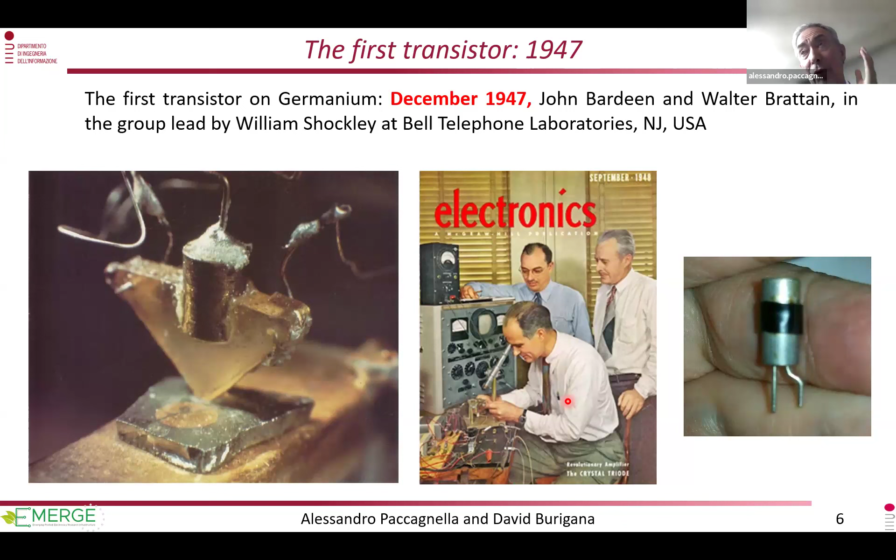Commercialization started, but really was not a big success for this type of point contact device. We had to wait until William Shockley invented the bipolar junction transistor, which then became the bipolar junction transistor we still use today. They were used first of all for hearing aids, but we had to wait for the real breakthrough.

The breakthrough was proposed by these two gentlemen from Japan, Akio Morita and Masaru Ibuka. They were traveling in the US in 1952, and they were two physicists who found that there was something new taking place - the transistor, something that really could disrupt the market and the society. And this is what they did.

They were not the first to propose the portable radio, but their product was a real success. It was cheaper than the American counterpart, it was handy, it was proposed in 4 colors, and it was easy to use. The portable radio became the first mass production involving transistors - millions of transistors were produced just for this type of application, a real killer application.

Japan was badly and dramatically defeated by the two nuclear explosions in Hiroshima and Nagasaki in August 1945. In 1959, Japan was already the first producer of germanium transistors worldwide, and at the beginning of the 60s, it was also the first producer of silicon transistors. So the industrial capability of Japan and the technological advancement, the quality of their research, was already in place just 10 years after the dramatic conclusion of the Second World War.

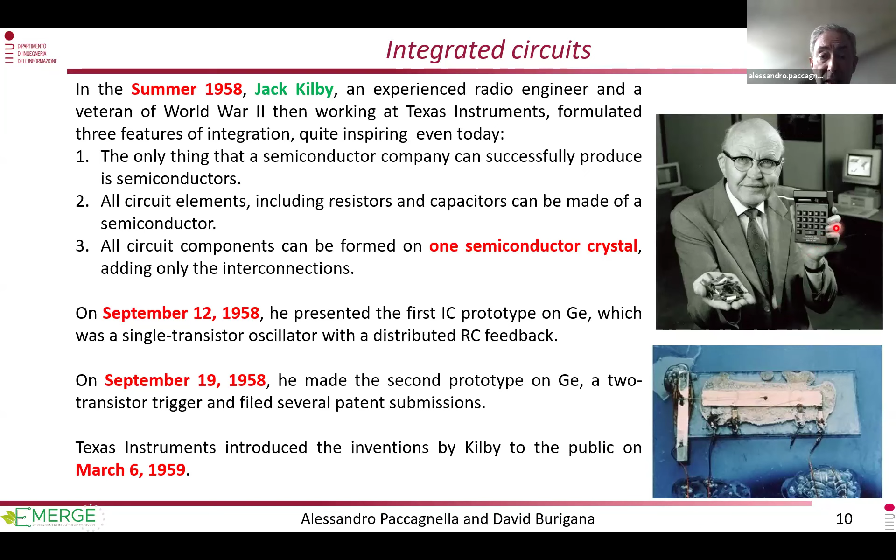The three inventors of the transistor got the Nobel Prize in Physics in 1956. Jack Kilby got the Nobel Prize in Physics in the year 2000 for his invention. It became something really innovative but risky.

You can see here how much was the role of federal agencies in buying this new technology, transistors and integrated circuits. The evolution of the transistor semiconductor market pushed toward big growth, but the percentage of sales due to the US government was still high at the end of the 60s, about 30%, and even higher for integrated circuits. It was a new technology, expensive, not immediately available for commercial use.

In fact, the NASA Apollo program was the largest single consumer of integrated circuits between 1961 and 1965. This again means there was a big start in the US, with strong support from governmental agencies to support this innovation.

Now, in this very fast run across the history of microelectronics, we arrive in 1971, where the first commercial microprocessor, the Intel 4004, was launched on the market. It contained about 2,300 transistors with silicon gate technology proposed by Federico Faggin.

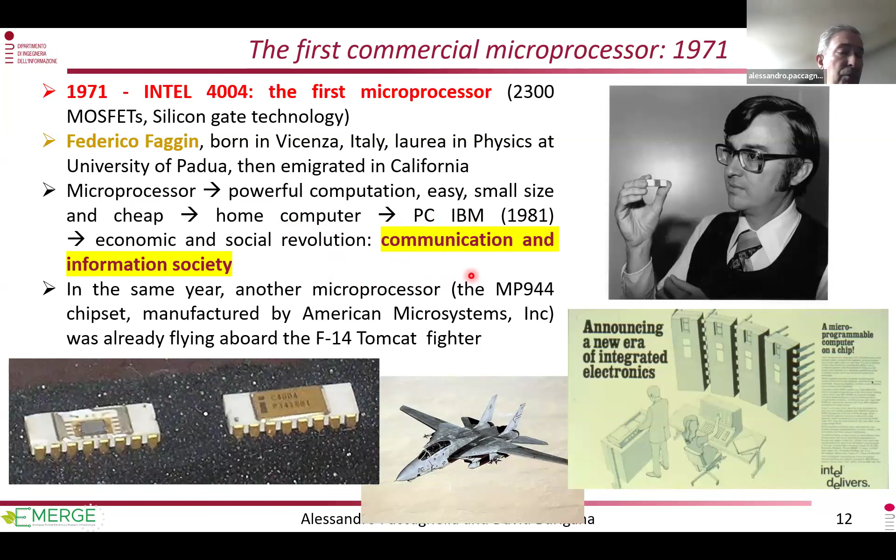Please notice that in the same year, another microprocessor, actually a set of chips manufactured by American Microsystems, was already flying aboard the F-14 Tomcat fighter. This means there was strong support by the federal government to develop this type of application, but we only learned about this 25 years later.

In the 70s, the world was divided into two big blocks facing each other: the American-led bloc and the Soviet Union-led bloc. The Soviet Union understood that microprocessors could change the rules of the game, so they started copying chips developed in the US. You can see here Intel, Motorola, Zilog, and again Motorola, with the copies of American chips arriving some years delayed.

It was a bad decade for the United States due to the withdrawal from Vietnam, the Watergate scandal, and Nixon's resignation. There was also, in 1973, the Yom Kippur War. But this looks not so unfamiliar these days, because after 50 years, in 2023, we have another big war started in the Middle East, and not yet, unfortunately, peace.

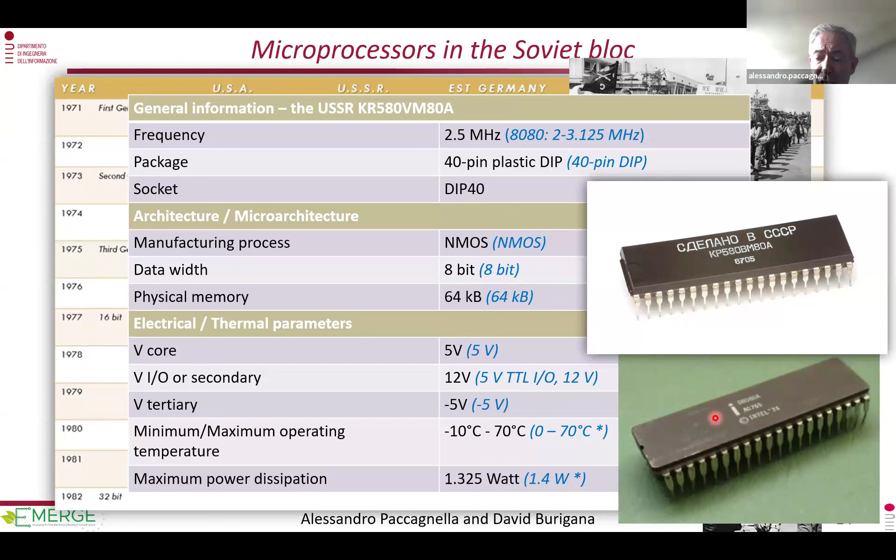In a few years, the technological and scientific power of American industries became no longer reachable by industries of the Soviet bloc, and this marked a substantial defeat of the Soviet bloc in terms of advanced technologies. How could this be achieved?

This is a paper from the CIA stating that in production of integrated circuits in 1973, the field was dominated by the United States, then Japan, then Western Europe, and the Soviet Union with just 4%.

How was this goal achieved of keeping Soviet Union production so low in the field of microprocessors and integrated circuits? This is a very important line: international embargo of semiconductor production technology and equipment. This means that by applying these rules, Soviet progress in developing a large and technologically advanced semiconductor industry would remain slow.

Despite occasional diversions, the embargo was generally effective in denying the Soviet Union access to advanced production technology, and this held true until the Soviet Union collapsed in 1990-91. But in the meantime, something important took place.

This was the formation of the Semiconductor Industry Association in the US, seeking to strengthen US leadership in semiconductors by working with Congress, the administration, and other key industry stakeholders. You see how important the relationship between industry and institutions was to support the development of semiconductor and microelectronic industries, and to keep the adversary at a delayed stage.

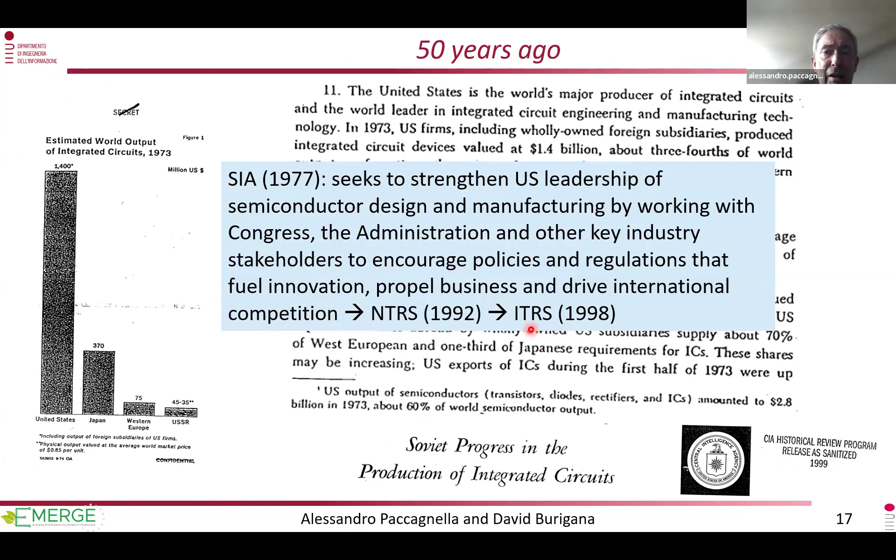Now we have more than 100 billion transistors in a single chip for the most advanced digital chips produced these days. This led to the evolution of our society from the transistor radio to the mini computer, to the internet, to mobile, and now to our era, which is the 5G or artificial intelligence era.

In 1990, we were in the full American crisis—6 Japanese industries were at the top, then 3 American, 1 European. In 1998, the ITRS was launched.

In the year 2000, it was the golden age of European industries: 3 Japanese, 3 American, 3 European—ST, Infineon, and Philips, which is now called NXP. In 2003, China joined the WTO, and it was a big change.

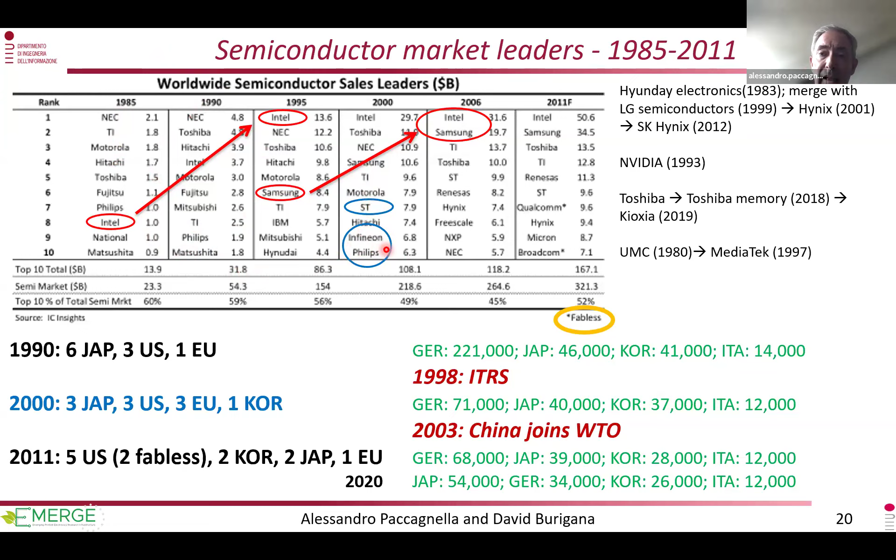The earlier success of Europe that we talked about was very much due to the fact that in this decade, the first framework program, the Esprit program, the Eureka program were launched, and Europe invested a lot of money in semiconductors. Then attention declined, and figures were not so successful, even though 25 years ago some people—and I report some sentences here—stated that semiconductors are really relevant to our work.

Semiconductors would seem to be the embodiment of a central tension that exists in our system of technology and trade. And here there is another scholar, Alan Tonelson, stating that failure to develop adequate public policy responses to globalized capital and technology flows will have staggering economic, social, and political implications that few are thinking about systematically today.

So 25 years ago, somebody stated it was important to think about the support governments should give to semiconductors. Semiconductors have in fact experienced growth of about 10% per year, more or less—a little less perhaps, but definitely increasing. This year is expected to bounce back and reach a figure close to $600 billion.

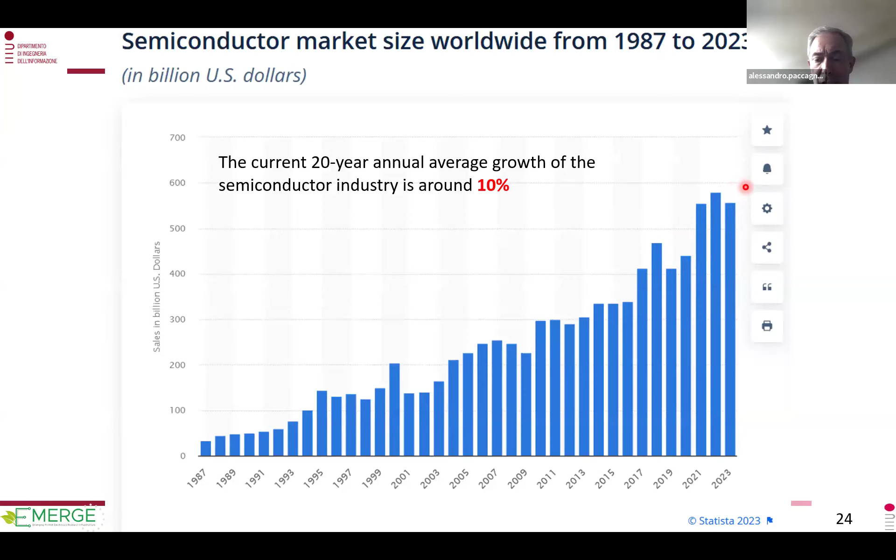If we look now at the situation at the beginning of this decade, we see things have changed dramatically. In the first 5 positions were Samsung, SK Hynix from South Korea, Intel, Micron from the US, and this new player everybody is talking about today, TSMC from Taiwan. This was a very important step made by the Taiwanese government to support this industry.

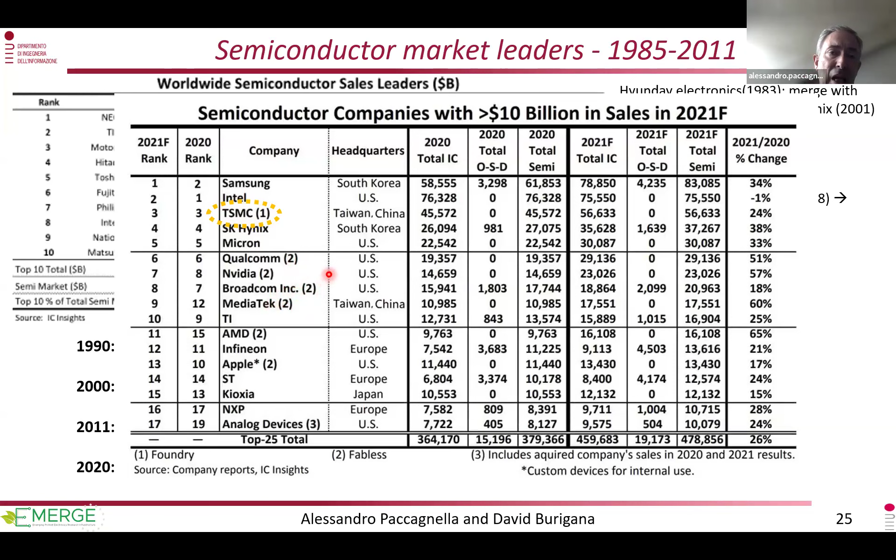But what about Europe? Europe stays here—ST, Infineon, and NXP. Japan is not flourishing, it's here. And you can see here, marked with number 2, a lot of industries which rely on somebody else producing the chips, because they take care only of designing the chip. This is a big push to the development and growth of TSMC.

TSMC was founded by Morris Chang in Taiwan in 1987. Please notice that it's the same year martial law ended in Taiwan—so it was really the opening of a new market, a new era. They started with relatively old technology, but very soon they were capable of advancing the technology nodes, and they are now leading, producing at the 5 nanometer scale, this company TSMC, and Samsung.

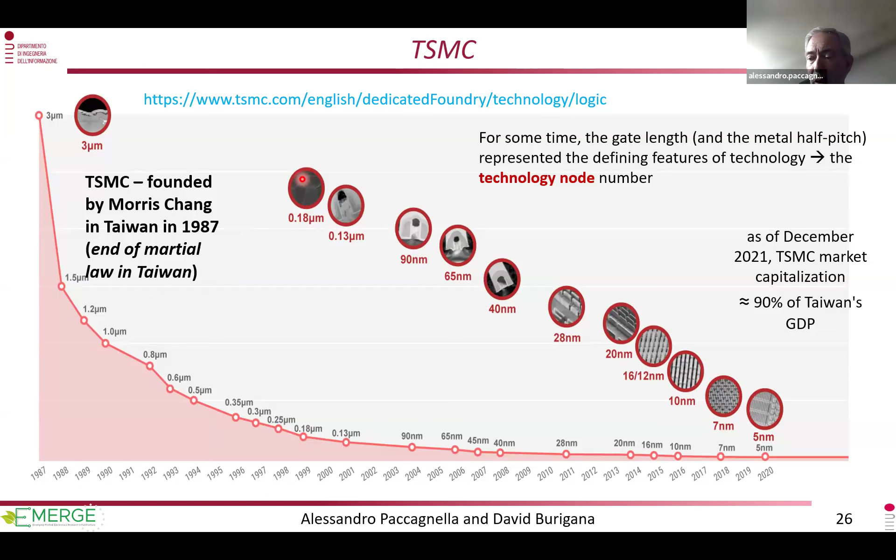Intel is a little bit delayed.

What about China? Well, China was very wise because the People's Republic of China invested a lot of money to develop their own semiconductor industry. President Xi Jinping is an engineer, so he's aware of the technological relevance of many products, and he is focused on semiconductors.

Semiconductors are one of the fundamental products to gain independence, relative independence, to an important degree, for his country. You can see here, if we look at the beginning of the century, Europe had a 20% share of the market, the same about US, and China was just showing up. But now China has gained an important part of the market, and Europe has declined dramatically, less than 10% of the market.

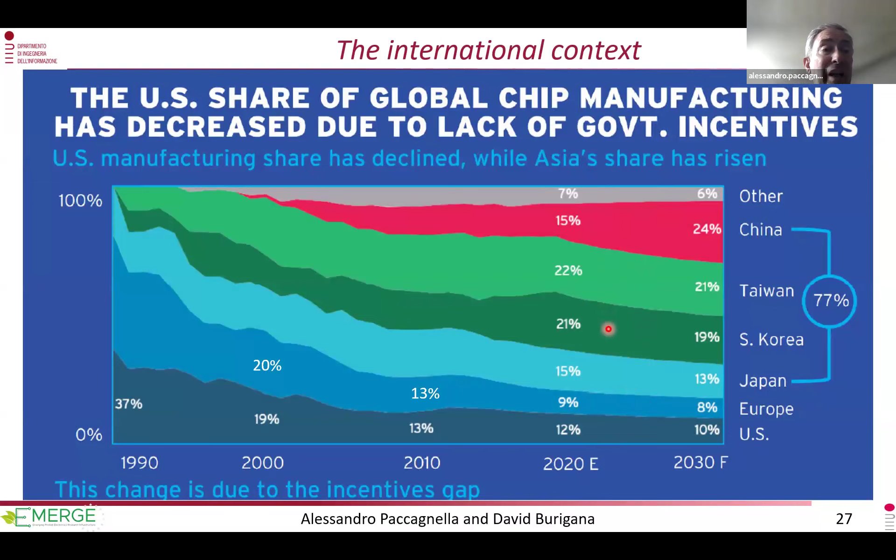The same has taken place in the United States. Basically, we have relied on other countries, People's Republic of China, Taiwan, South Korea, to produce the chips that we need for our products. This means that we really rely on East Asia, at least part of East Asia, China, Taiwan, South Korea, or Japan.

And you know how important and how relevant is now the situation between China and Taiwan. We'll speak about it in a few minutes. And here it is.

Taiwan is considered by the People's Republic of China as a separate province, and China expects to take back Taiwan. So the tension between mainland China and Taiwan has been growing during the last years, and we are scared about a possible war between China and Taiwan.

Somebody says that possibly the relevance of TSMC and of the silicon ecosystem in Taiwan may shield it from Chinese invasion. We'll see if Taiwan will remain less connected to China as it is now in the next years, even though some war winds are blowing in the Formosa Strait.

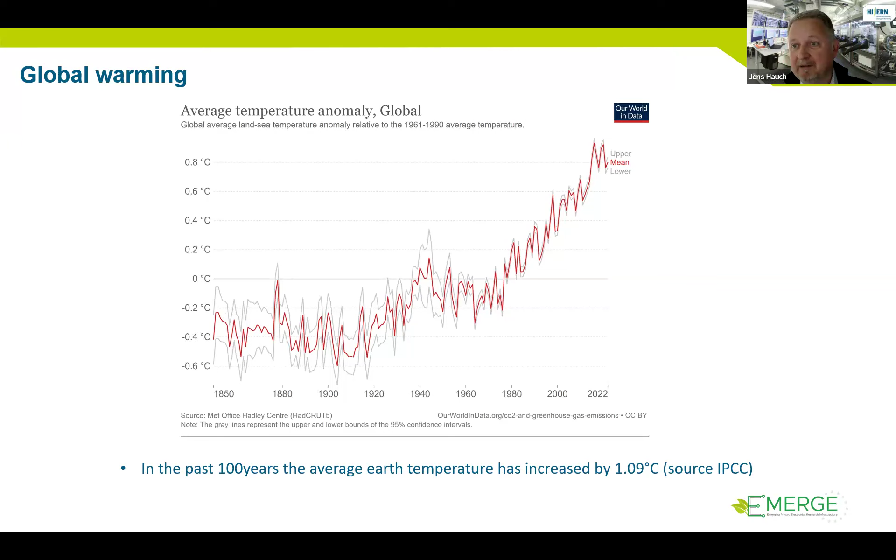This is from the IPCC report. We're at 1.09 degrees Celsius currently, and it does not look like we are really slowing down, to be honest. This is where we, as scientists and material scientists, can help.

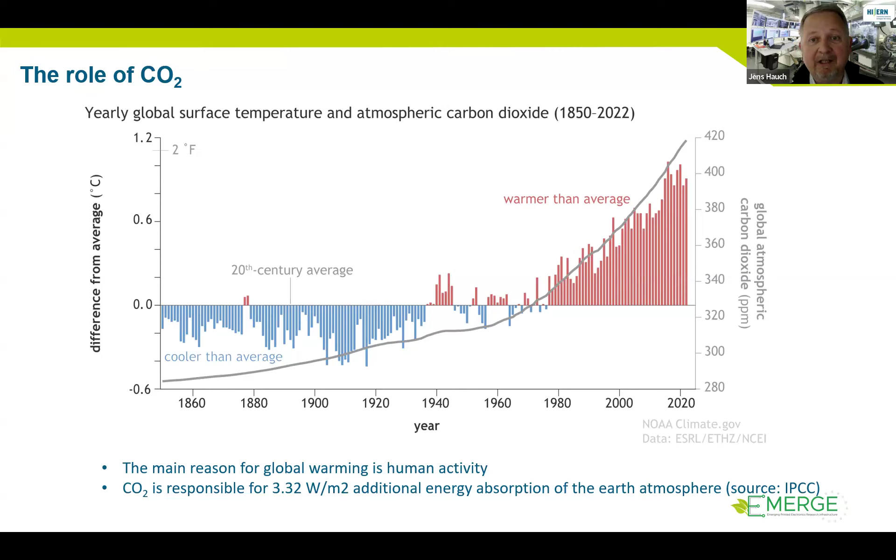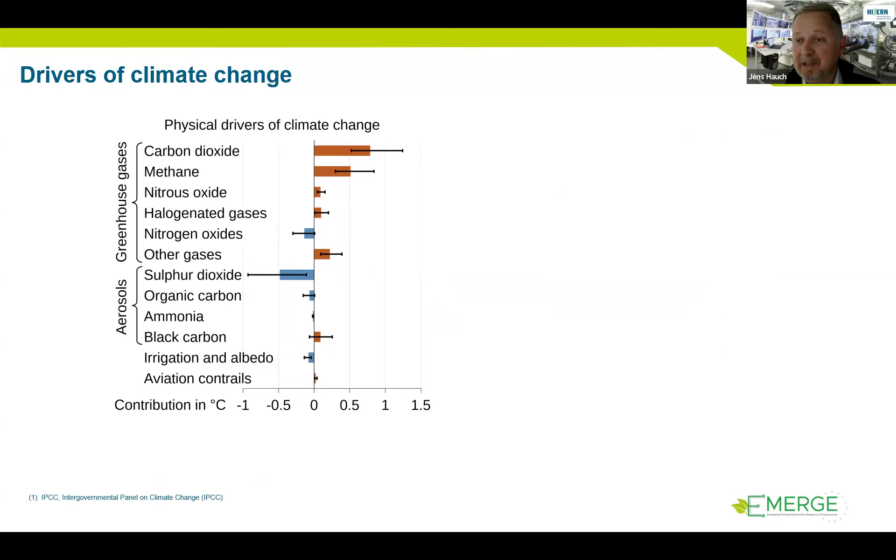If we look a little closer, we can identify the reason for this. I think this is fairly uncontested: it's CO2. It's very clear how much of a contribution CO2 gives to this climate change, and this is all scientifically investigated and documented. There shouldn't really be many reasons to discuss it, although politics is contesting all of this. It's also fairly clear that this is strongly related to energy consumption.

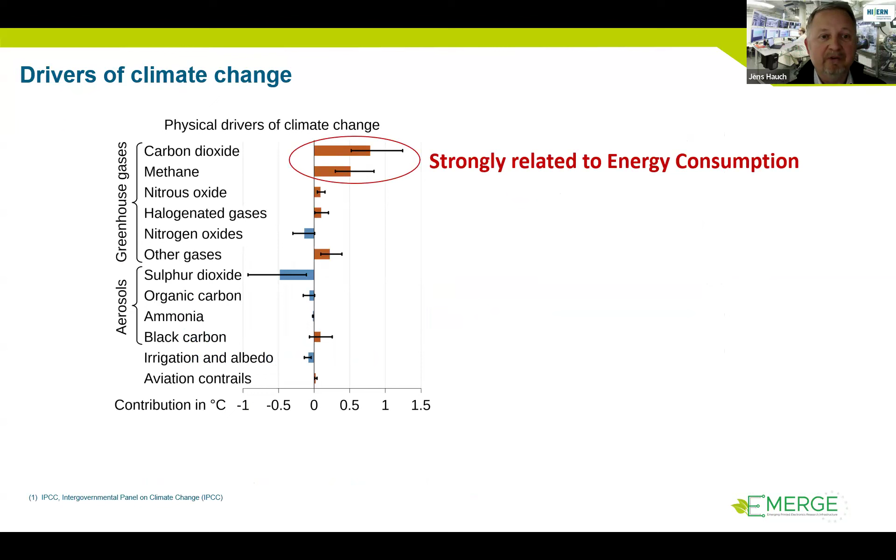The good news is that we actually do have solutions. If you look at the IPCC report, which I can recommend to everyone, you can see in detail what we can do and what the potential is for CO2 reduction for different technologies.

Now, this is a little small, so I'm enlarging this part up here. When you look up there, you can see that solar energy has the highest potential for reducing CO2 emissions out of all the technological solutions we have available. That's good for me as a photovoltaics researcher, but it also means this is an important subject.

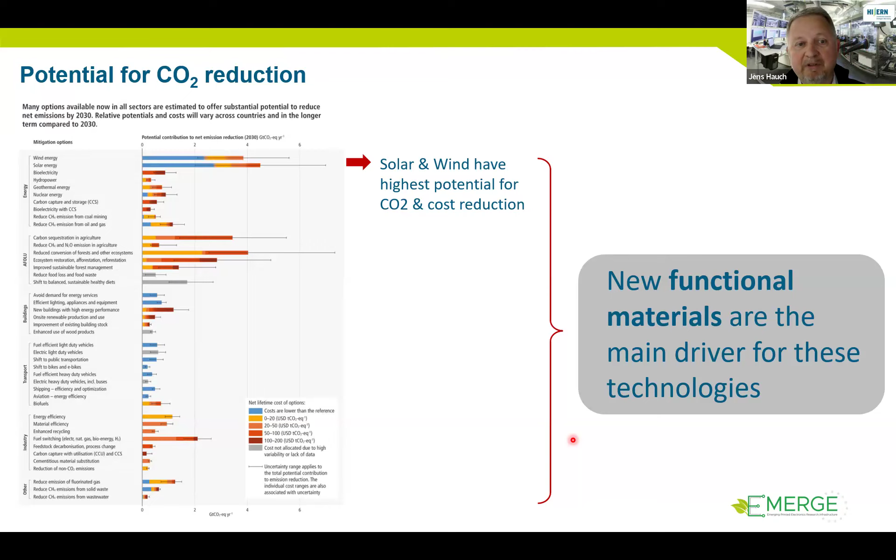But I don't just want to talk about this solution. What I want to make clear is that apart from solar and wind having the highest potential for CO2 reduction, and also for cost reduction, new functional materials are the main drivers for these technologies. This is where things start, with the development of new materials and processes that turn these materials into functional materials to fulfill certain functions.

So this is a short introduction. The next question is, what is actually needed to solve this problem? From a materials point of view, we can take on these major technologies that we're looking at.

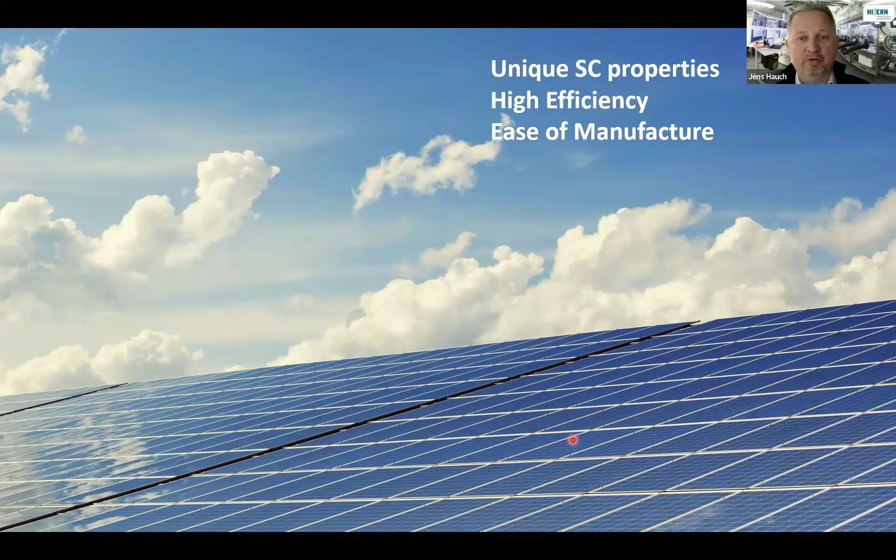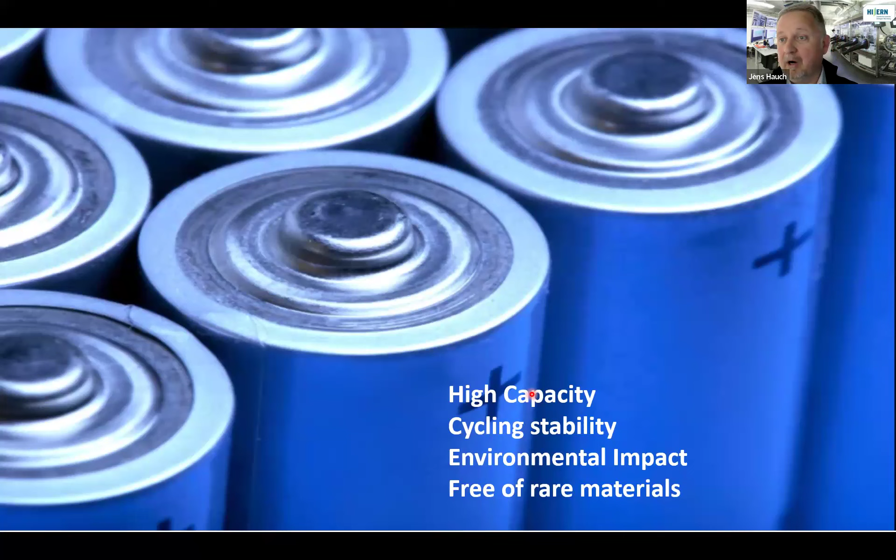For solar, we're talking about semiconductor properties. We need efficiency, we need simple manufacturing processes, that's what we're looking for. But similar things go for wind: we need lightweight materials with high strength that are abrasion resistant. Or we need batteries with high capacity for energy storage, low environmental impact, ideally something that doesn't use rare materials that are hard to come by and that we will run out of if we need too much capacity, or we need fuel cell materials.

When we do all this, we shouldn't get lost too much in just physical properties, because one thing we always need to consider — my advisor told me the most important physical property of a material is sometimes its cost. We need to pay attention to this as well. We need to find ways to solve these problems with low-cost materials that are abundant, available, and ideally recyclable, because we need a lot of these things.

So now we know what we want. The question is, how do we get there, or how long does it typically take? This is reasonably well known; many technologies have been developed over the past century or so. Of course our abilities have changed, but traditionally, a new technology from its discovery to its application in a large-scale commercial product takes about 20, 25 years.

That was the case when I was a PhD student, and that still is the case today. There are no firm studies, no real statistics, but the 20 years are something.

If we look at our calendar, it reads 2025. Many of the goals on our table for tasks we need to resolve to limit climate change, we're looking at solutions that need to be implemented before 2050, way before 2050. 20 years from now is 2045. We can't wait until then to solve things. We need things quicker. So this is my message.

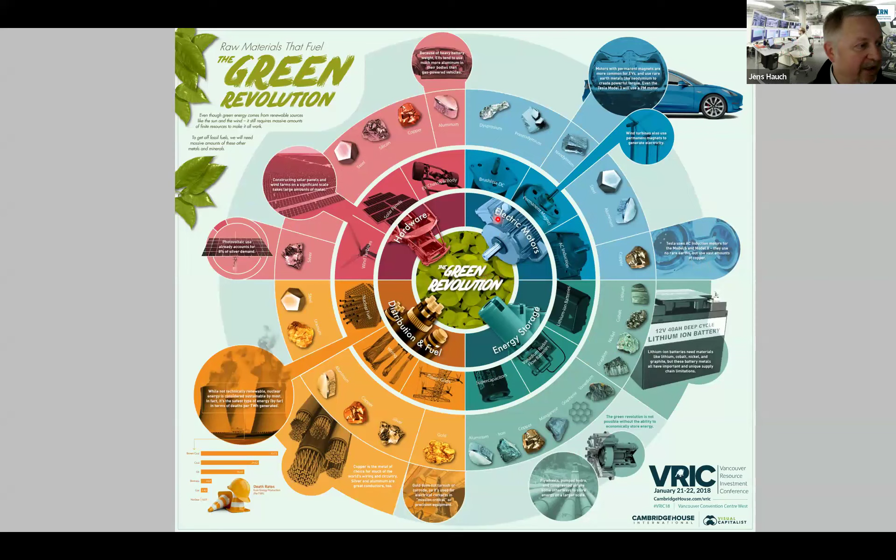Here's a plot showing the green revolution, going from raw materials all the way to technological solutions in the end. What you see is there are many things in between. We're going from the outside to the inside here, starting with a raw material that we have to turn into a functional material. Then we take this functional material and somehow turn it into a device which fulfills a certain function. And with that, we can actually start building systems.

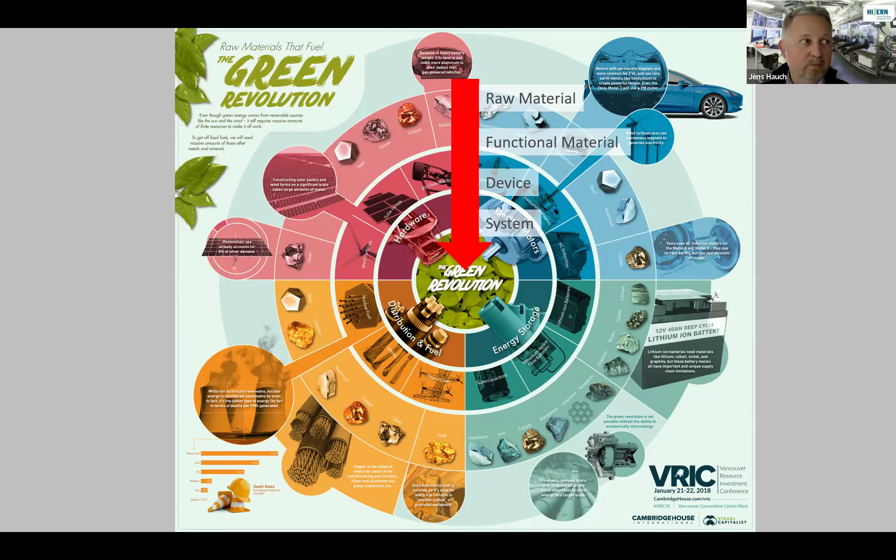So wonderful, how do we actually do this? Politics has come up with an answer, and it was actually implemented already more than 10 years ago. So this is not such a new idea.

Back then, there was a so-called Mission Innovation implemented in 2015. This was opened up by President Obama, and he said we can do it faster. I would contest to it: we can't just do it faster, we actually need to do it faster. So we have to accelerate.

From the acceleration part, let's jump into actual technology development. Since I come from PV, it makes sense for me to start with a small case study of photovoltaics. My case study starts in 1955.

1955, it was actually quite amazing. Bell Labs built this system, a module of solar cells together with a battery that could store this, and it was marketed as a solar battery. We don't actually know what the price of this system was, but we're fairly sure it was much larger than $100 per watt. It was quite innovative and visionary. Not sure how many systems actually sold.

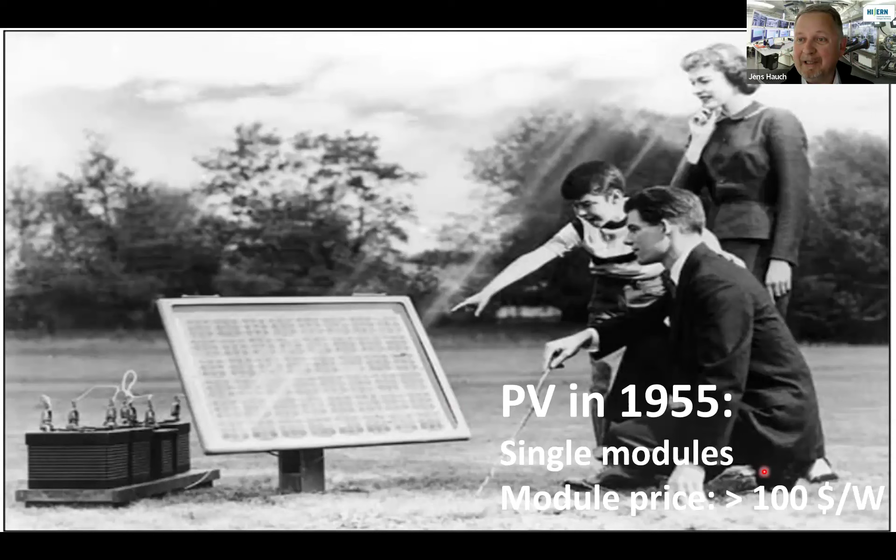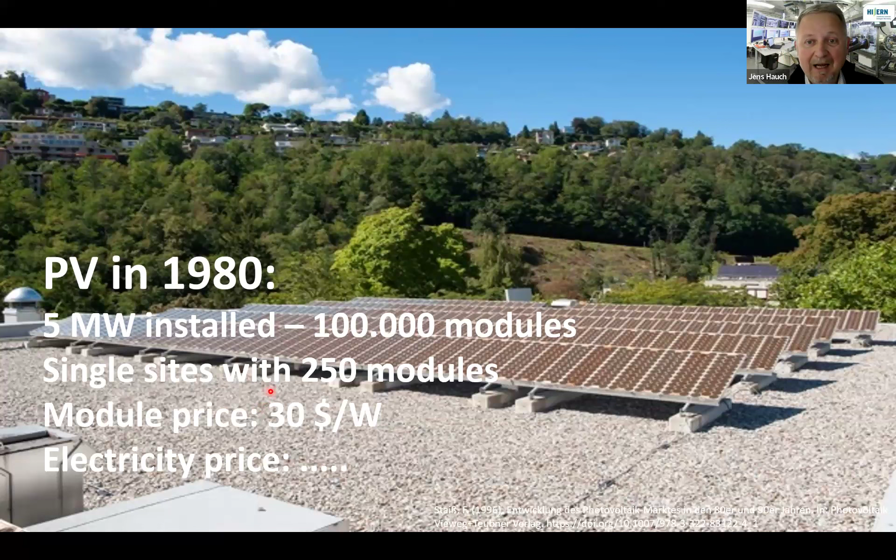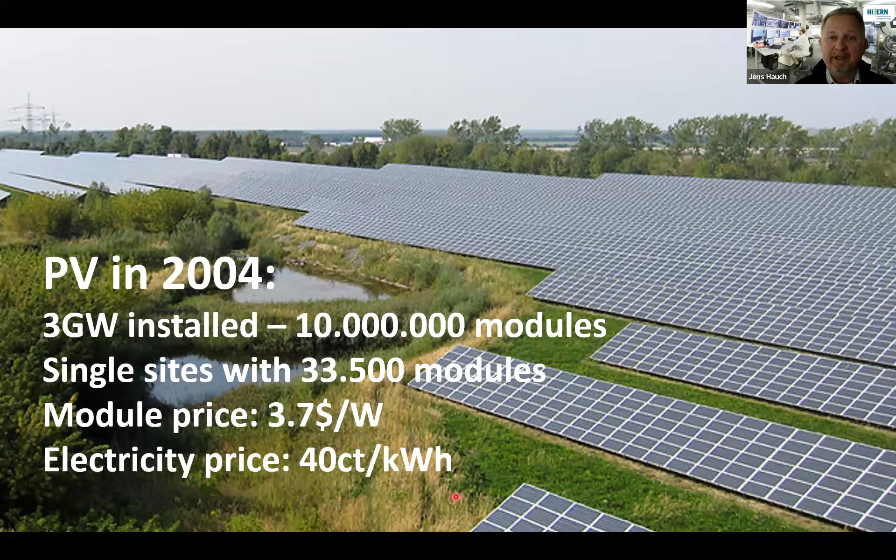Fast forward another circa 25 years, in 2004, we had entered the gigawatt era from the megawatt era. Now millions of modules installed, individual sites with tens of thousands of modules. Module price roughly $3.70 per watt peak, and a levelized cost of energy now at roughly 40 cents per kilowatt hour, which made it pretty interesting because this isn't so far away from actual energy prices elsewhere.

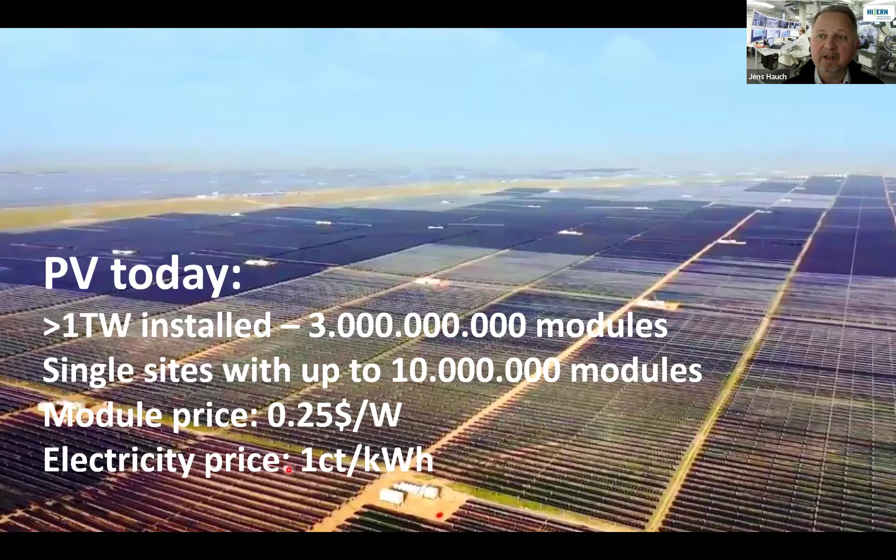Now let's fast forward again. 25 years forward isn't possible, but where are we today? We've entered the terawatt age. We have billions of modules. We're approaching a time on this planet where we'll have more solar modules than people. Very interesting change. We have sites now that contain millions of modules, not just thousands or hundreds of thousands, but millions. And we're approaching electricity production prices of 1 cent per kilowatt hour. This is the lowest cost energy source we have ever had.

So how do we get there? A little drier representation of what I just showed you is this chart, which we call the learning curve for photovoltaics. It comes from the ITRPV roadmap, an industry-driven roadmap, put together mainly by the VDMA, a German Association of Machine and Equipment Builders.

Here you see on one end the average module sales price, the cost per watt in a module in US dollars, calculated as the value in 2011, versus the total cumulative shipments. As you see, we have a fairly nice relationship on a log-log scale.

This relationship, this exponent, is actually what defines the learning rate of a technology in the end. The important point here is that this does not reflect time.

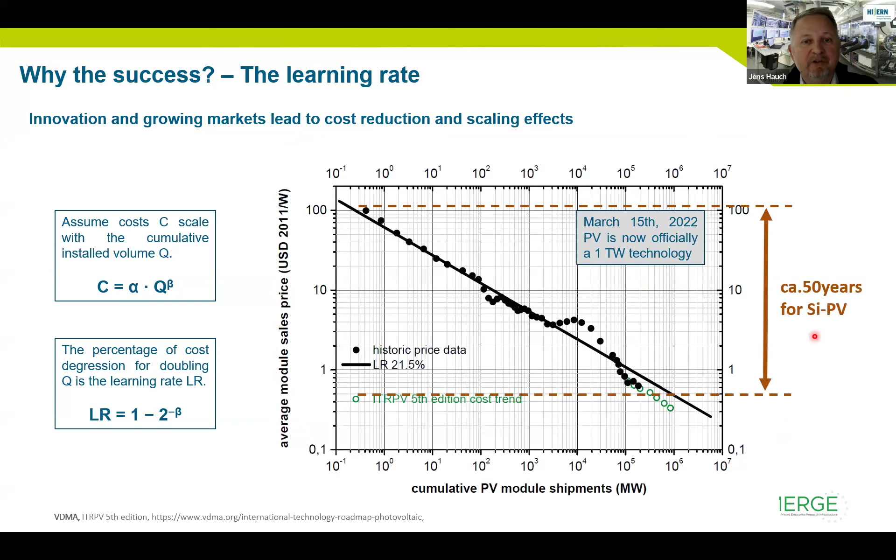And while this is a great success story, it's also clear that this took 50 years for silicon PV, a technology that is now well established, but it's also hitting its technological limits these days. So the question is, where are we going from here?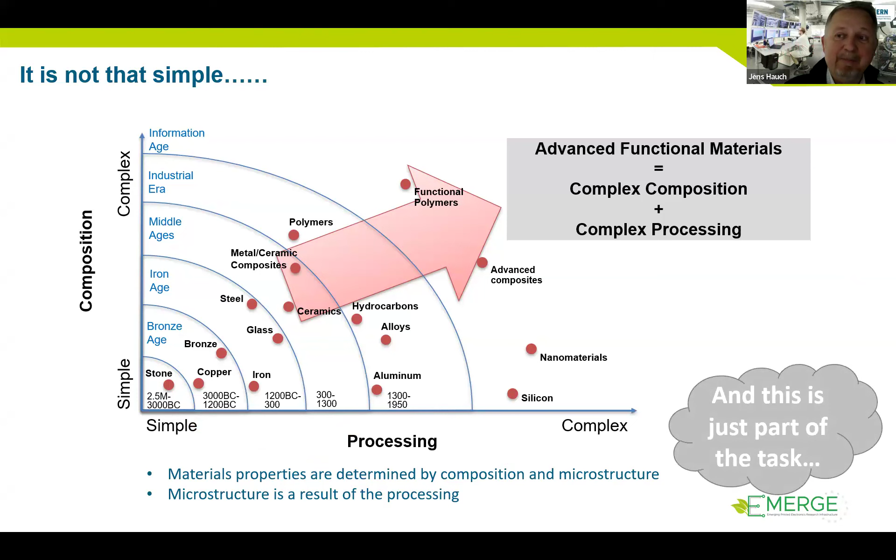So this is what we have to deal with, and making this material is really just part of the task we have to accomplish. We start with intrinsic properties that develop on the scale of atoms and molecules. Then, as we assemble these into a micro scale, bringing many molecules together, they turn into composites. We get to the micro scale, and certain functionalities appear. If we just have 10 materials and turn them into composites, we may have to investigate thousands of composites. So there's a combinatorial problem we need to solve.

And then we need to go to layers, at least for the solar cells we make. They're multi-layer structures, multiple thin films stacked on top of each other. Each film has its individual function and purpose in the architecture, and we need to make sure it retains this, and that all these layers work together, that we don't destroy layer number 2 with the third layer we put on top. There are probably hundreds of thousands of combinations we can make there. And before we get to a product, we find that if we want to investigate every possible combination, we'd actually have to look at millions of devices.

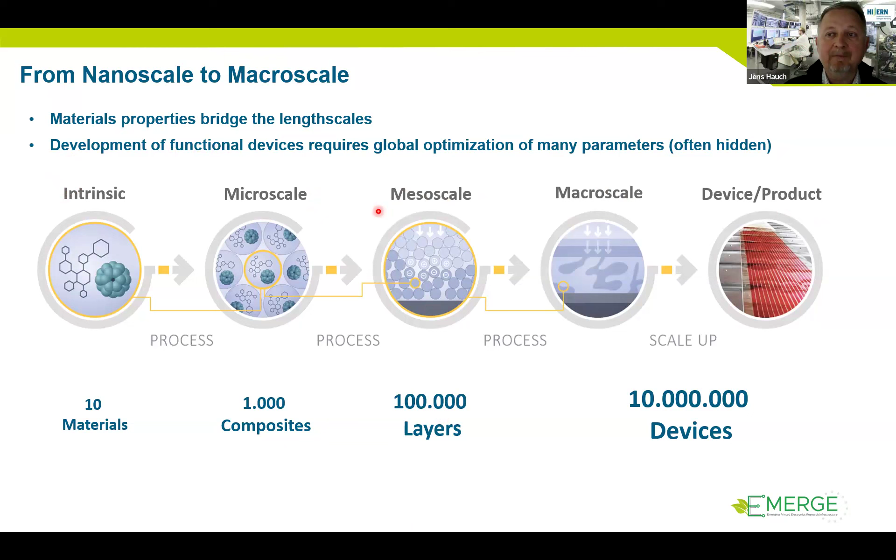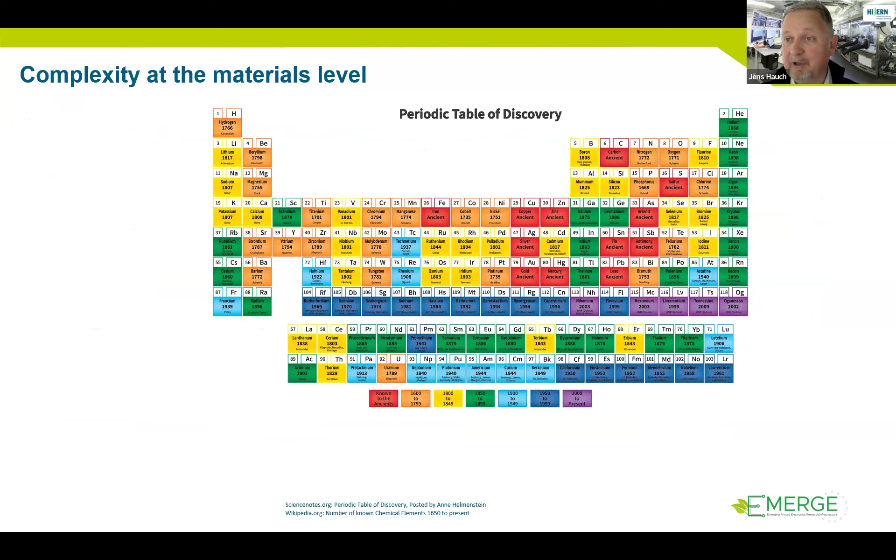If you look at it, starting from the material scale, it's quite complex because there are many, many choices of individual materials we have. The number of chemical elements we can choose from is getting larger, as more and more were discovered, the last one in 2017. So our task isn't getting easier.

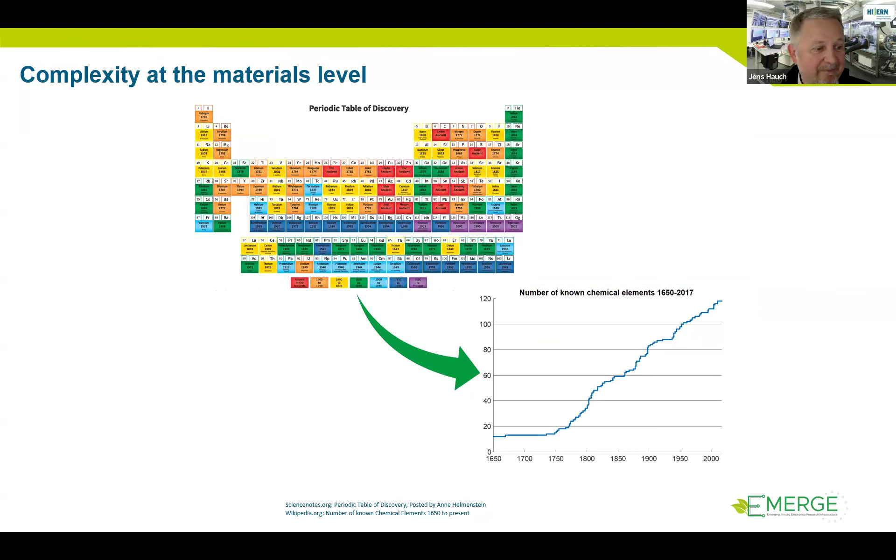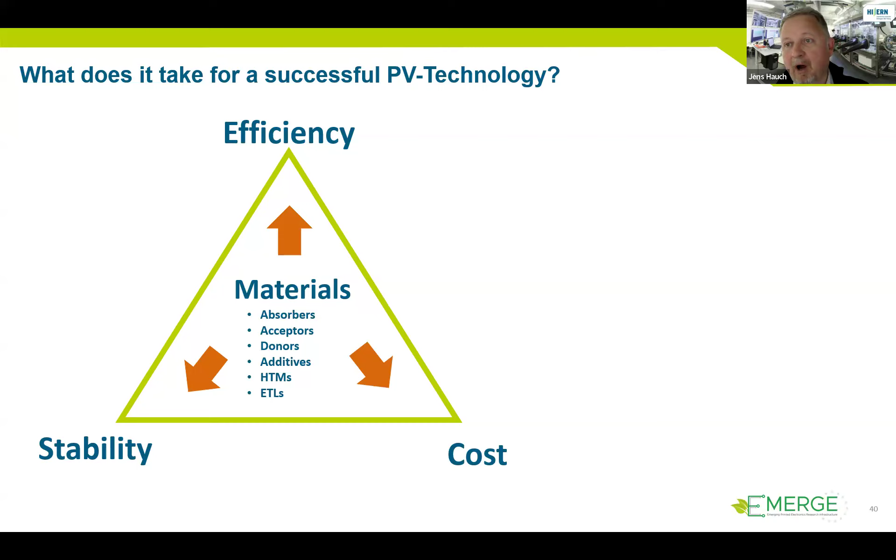Just in recent years, about the past 5-6 years, we have started utilizing automation on a significant scale and artificial intelligence to solve these problems. We want to go massively parallel, optimize multiple parameters at once, do it faster with higher precision, and with less material consumption than we've done in the past.

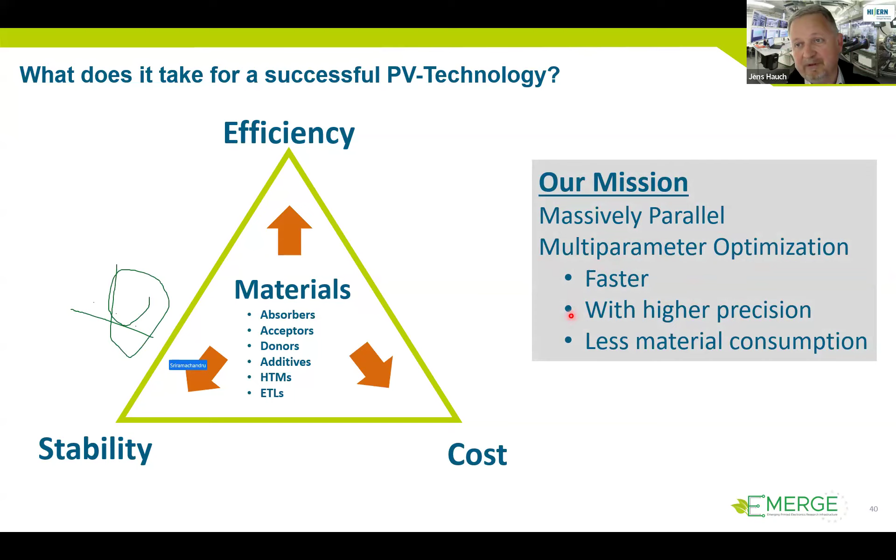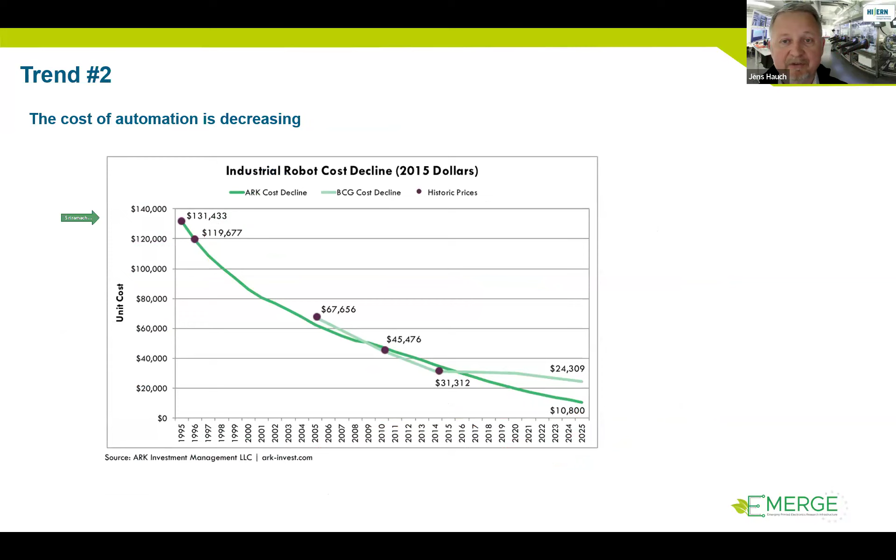Another important trend is that computational power is becoming much lower in cost. We all know our cell phones are getting more and more powerful - in fact, much more powerful than anything I had available as a student. But this is good news, because we can use this computational power to solve our problems more quickly, hopefully.

Another important point is connectivity. We don't need to do things in just one place - we can connect knowledge with itself, more or less. We can utilize knowledge from other places to learn from it, to gain experience.

But this is a complex task because publications, for example in the field of perovskites, where we're also very active, at this point in time I believe you have something like 10,000 publications per year.

Nobody - not sure what I'm showing here. Somebody's experimenting in my presentation. Wonderful, modify the slides, yeah? So that's not me. Anyhow, so you can comment on my presentation, obviously, as we're live.

But connectivity is rising - we can connect the data.

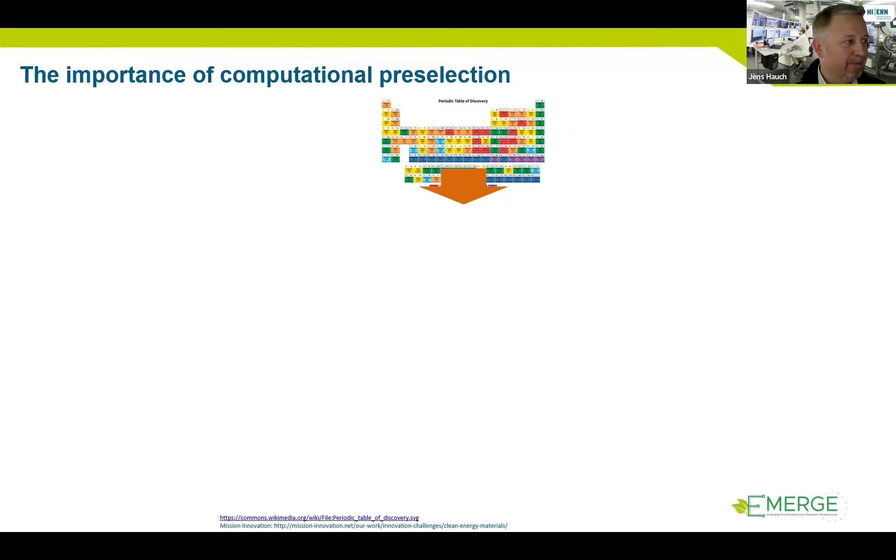So how do we address this? One thing is we need to reduce the complexity - we need to reduce the space that we're working in. One way to do this is computational pre-selection, a tool enabled by computational power that allows us to narrow billions of molecules down to maybe hundreds or thousands that we can actually investigate. So one important takeaway: use simulation, and use it wisely. It can make you faster, improve your results, and get you to where you need to go.

Another thing we're doing is going from manual to automated, and to autonomous materials research, to accelerate it. What do I mean by this? Here's a typical experiment in the lab. Anybody who's a material scientist knows how to do this: we make a hypothesis, generate the materials we need to test it, process the stuff, characterize it, evaluate it, modify our hypothesis, and start over.

This is very limited in the way you can parallelize it. A different way: automation can help us here. Automated platforms, for example, can help us take this step and perform it faster, more reproducibly, and parallelize it.

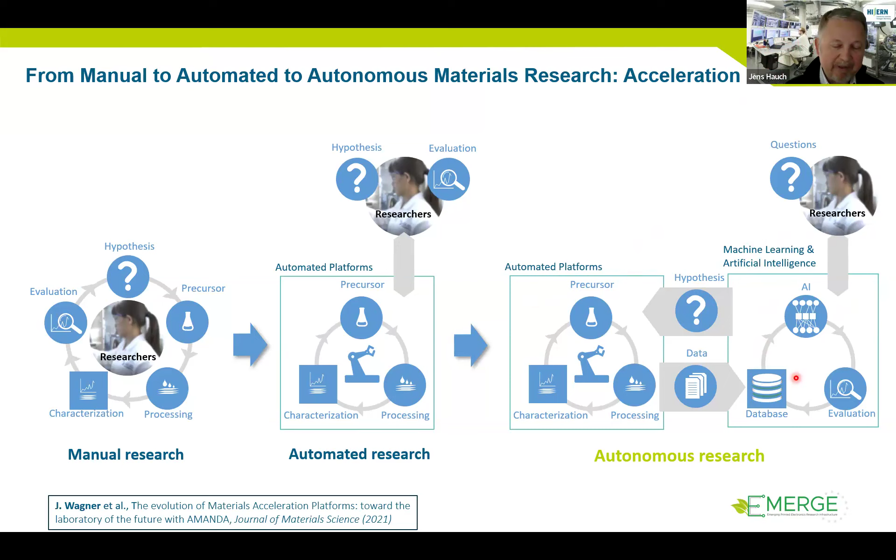That's what we can use it for, and that's how we can pose the questions. This may sound like it's limiting researchers to some degree, but it's actually not, because it allows them to ask the right questions. It allows them to utilize and harness the power of these systems and move faster. We believe this is actually the key to accelerating research in this century and getting to results faster.

So this is a similar thing with robotic systems. We have AI and ML, we have a data layer where we collect our data, and we have researchers that interact with this. What's important to notice here is that there are a few levels.

So we have the level of automation—simply pieces of equipment that do the same things over and over in a repetitive manner. Then we need orchestration, which is the next level: we have experiments that are suggested, and computers that tell these setups what they should do and when they should do it. That's orchestration.

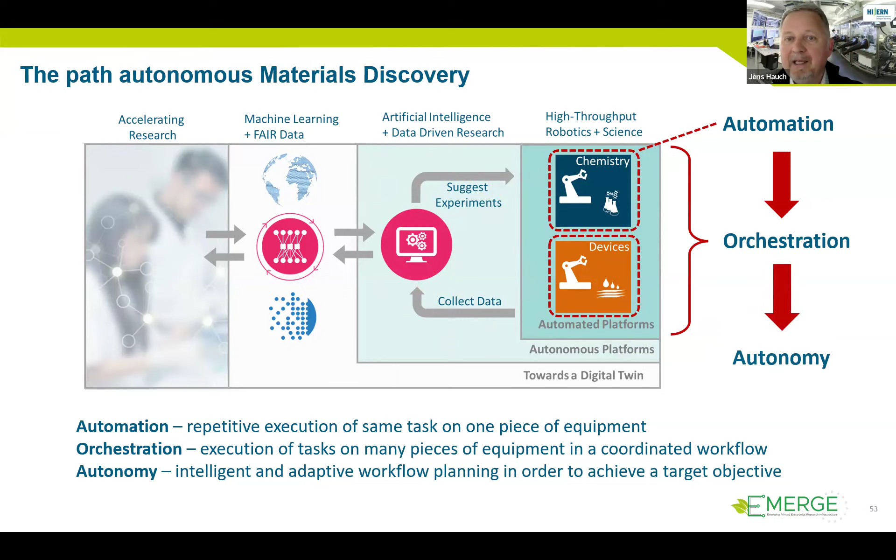And then autonomy is the next level above that, where decisions are actually made on which experiment should come next and where we should look for another solution in this high-dimensional space.

So with this rather lengthy introduction, let me get to a few results from our laboratories today. In my research department, we come traditionally from photovoltaics, material science researchers, and we have all the domain knowledge needed in this field. In the past few years, we've combined it with what I call Lab 4.0 technologies: robotics, AI, machine learning, databases, FAIR data. These are things we've introduced into our research.

Now we are using that to develop approaches to use this data and navigate complex spaces more quickly, and learn with fewer experiments. To do this, we've developed a portfolio of automated processes and infrastructure.

Unfortunately, I did not switch off my phone. Now we have it.

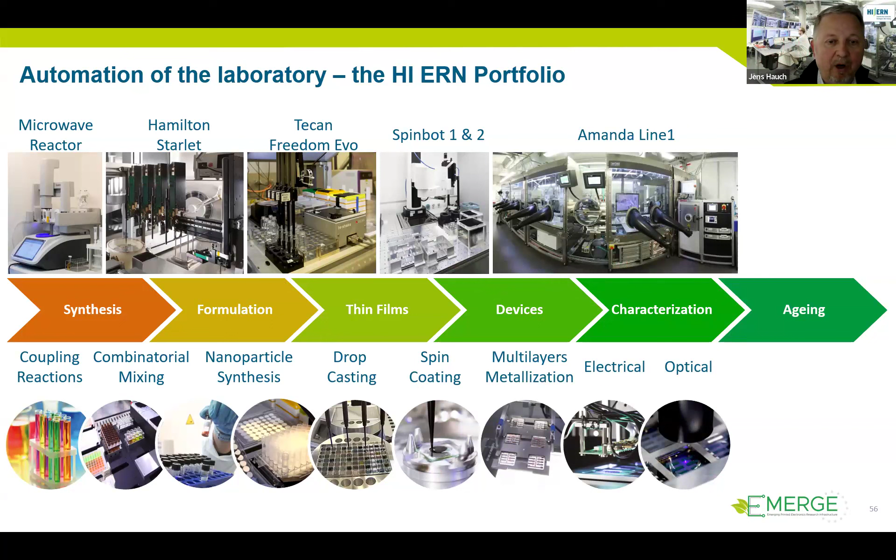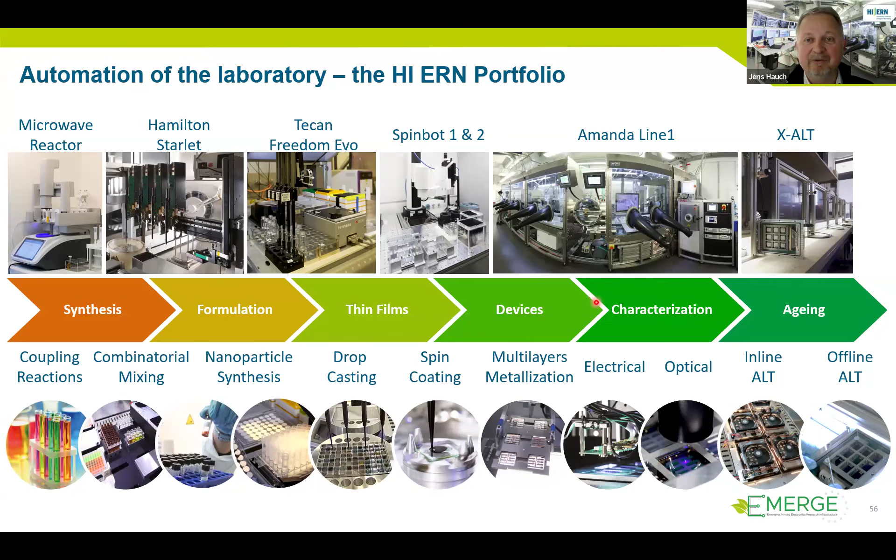So we've developed a portfolio of automated infrastructure that takes us all the way from synthesis through the full device to aging. We have microwave reactors that allow us to synthesize materials in parallel and automate it. We can do solution formulation at various levels, with platforms for automated pipetting. We can go automatically from the solution to a thin layer, and this is what we're using our spin bots for. We've developed a system that allows us to make from these layers complete functional devices, characterize them, and go all the way to accelerated aging tests. Already quite a bit of this development chain is something we have covered in our labs, and we're now utilizing it to perform the science required to bring emerging photovoltaics to a product level sooner.

So going a little deeper, what can we do here? Our biggest piece of equipment is what we call platform line 1. It's driven by a software system called Amanda, which can actually drive multiple platforms at once. What you're seeing is a fully integrated platform that can take us from solution formulation all the way to the finishing of a device and characterization. With this, in 2022, for the first time, we documented how to do autonomous device optimization. So we're quite proud of that.

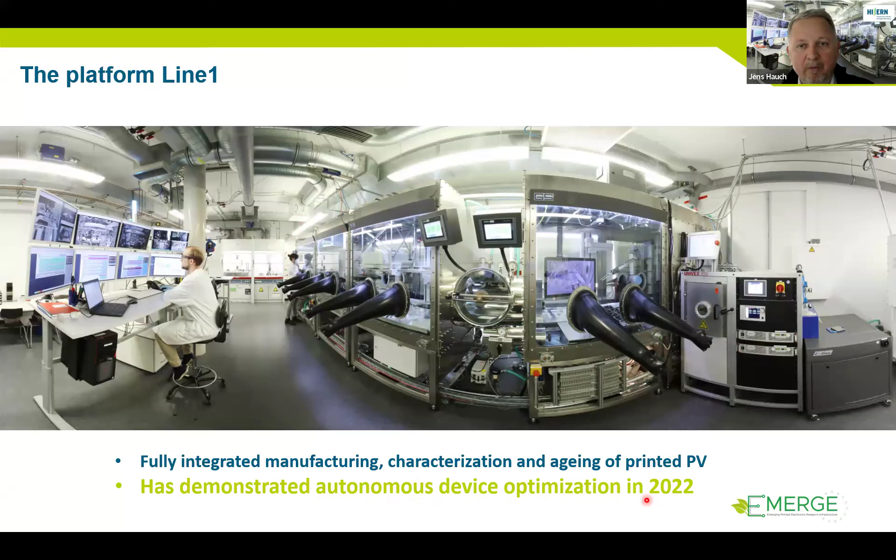So what do we do at the level of materials, for example? In materials acceleration, we work with library sizes of hundreds of samples, creating something like thousands of data points. This is still strongly knowledge-based, although we are now in the process of demonstrating workflows that are integrated with pre-selection in silico. Here's an example of how such a platform works.

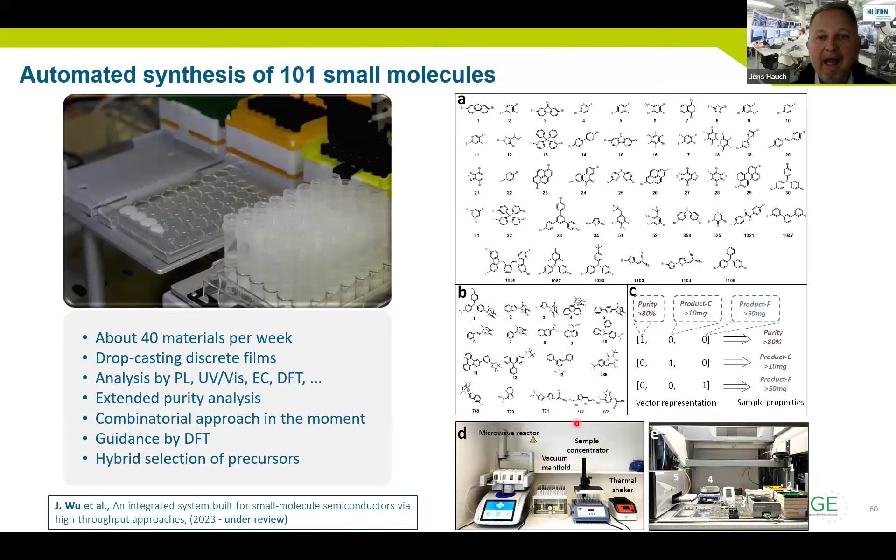This is our Tecan platform, an automated 4-channel pipetting system with the ability to mix and agitate solutions. We're using this to do actual synthesis in solutions. What you're seeing here is a lead-free perovskite synthesis. We're also using these platforms, as you see on the right side, to run parallel synthesis of small-scale molecules. Here we can go from 40 to hundreds of materials that we can investigate per week. Yet in a space of millions of options to choose from, 100 molecules per week is not much. It just lets you investigate a very small part of this space in a week.

That's where we are in close cooperation, creating closed loops with machine learning specialists, in this case from KIT, Pascal Friederich here, who has helped us utilize the characterizations we make, along with machine learning and density functional theory simulations, to predict which materials we should synthesize next, helping us funnel this down to the best solution.

In this case, our goal was to develop a better hole transport layer. We developed multiple molecules that work, falling into different efficiency classes. Spiro-OMeTAD was our reference material. We could make and develop a small molecule using this synthetic loop that gives us the same performance as spiro-OMeTAD in the same device architecture, getting above 24% efficiency for a single junction. That's a very, very good result. This is just one example of what we're doing. We do this for lead-free perovskites, small molecules, hole transport layers, electron transport layers, even semiconductors. There are many ways to use this, and there's still a lot of focus on method development: how can we actually utilize these technologies to progress faster?

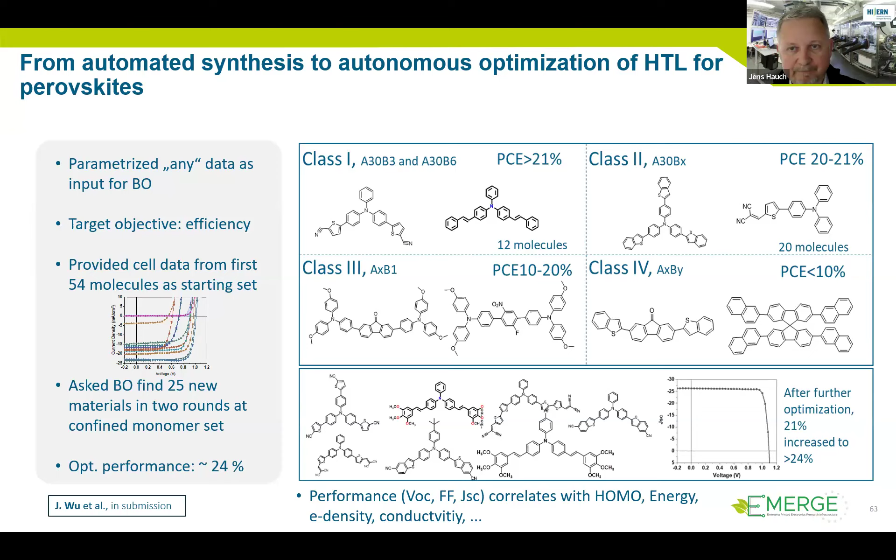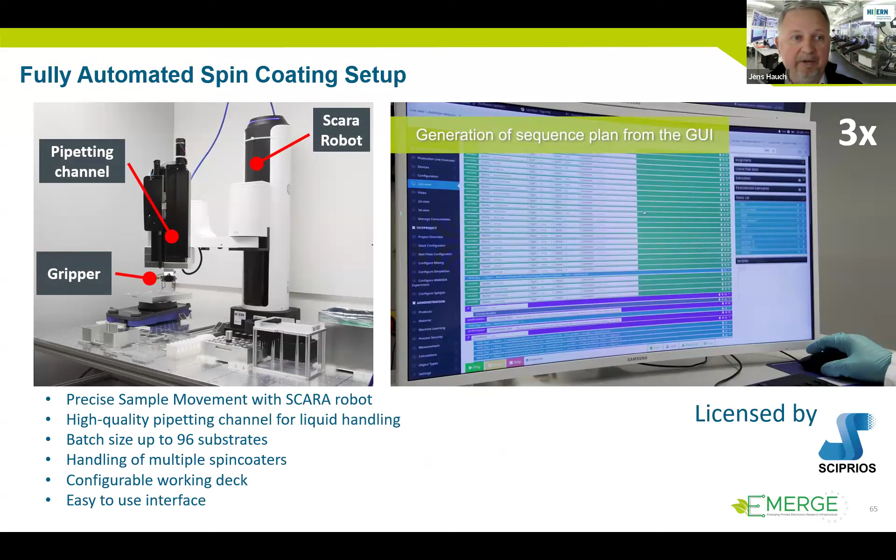How do I get rid of the tone here? This is annoying. Sorry. It's nice to see it move.

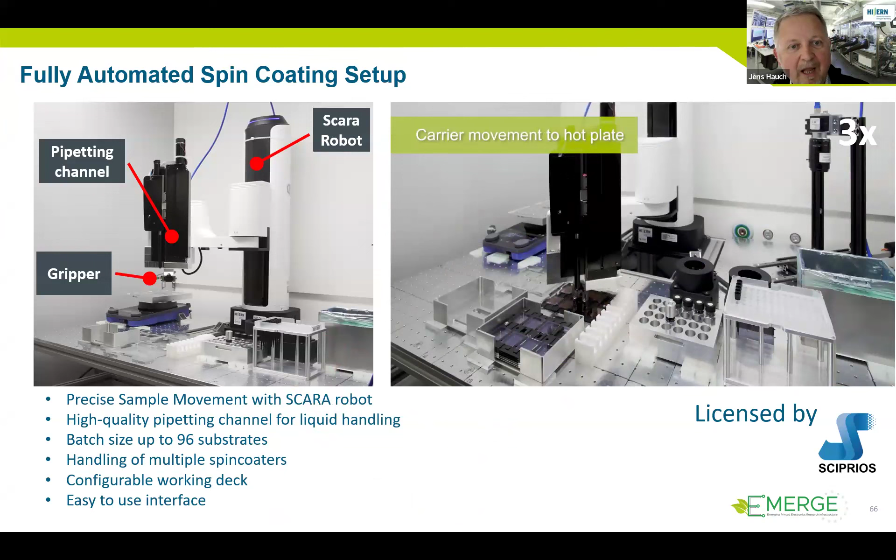Unfortunately, I have no idea how to stop it from making that noise, so just bear with me for a second. But here you see the operation of such a system and what it does. And transport it. Let me stop this because the noise is a little annoying.

Amanda, I already introduced to you. What do we have here? Or line 1, actually. Amanda is a control software. It also controls the system I showed you in the previous slide. Line 1 consists of a control desk.

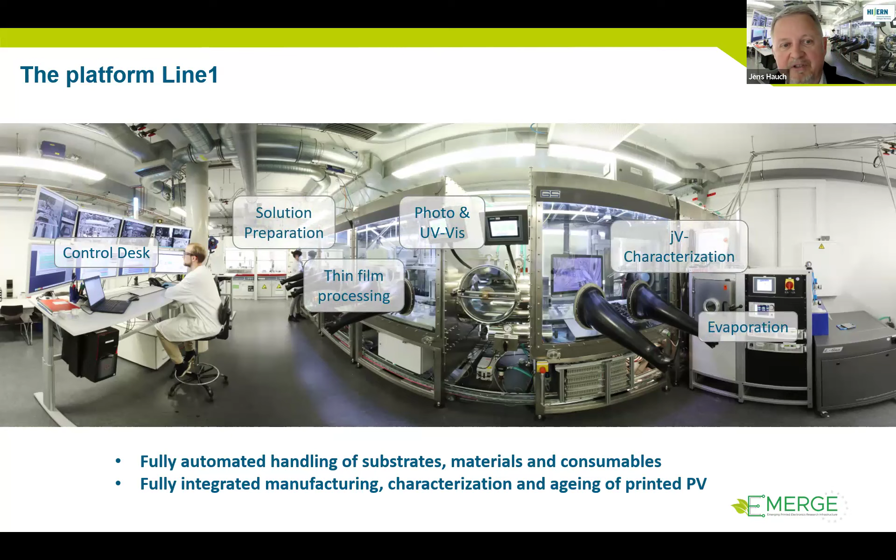Then we have the solution preparation stage, thin film processing. We do a photo UV-vis characterization of each layer that we produce, put it in a database. We evaporate back electrodes, turn them into devices. We do JV characterization of these devices. And then we can do accelerated testing.

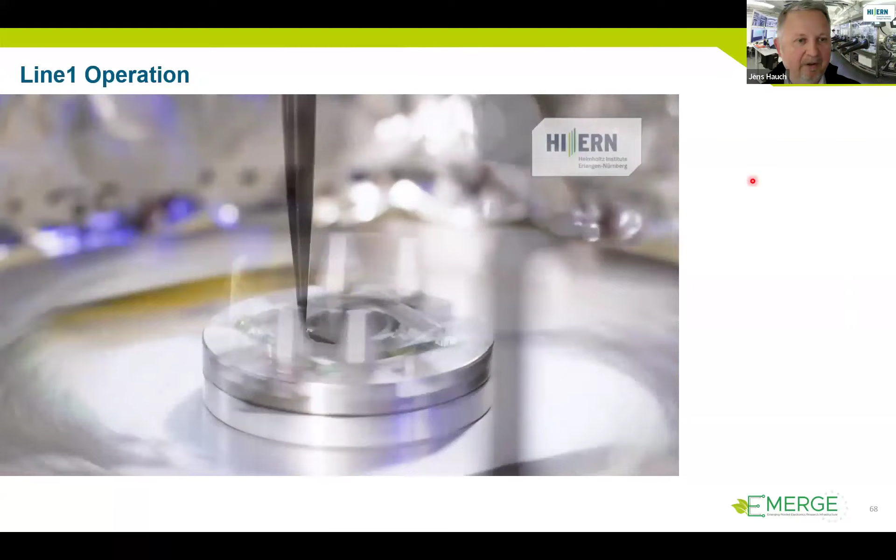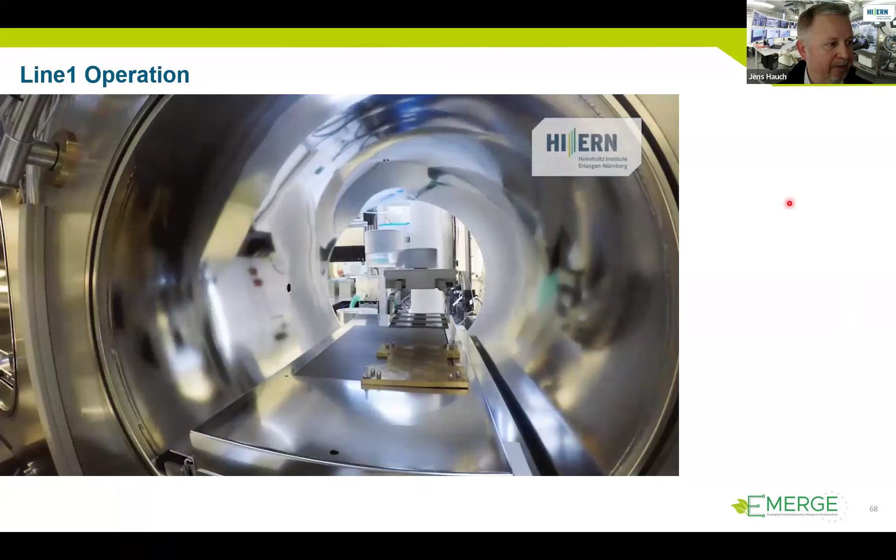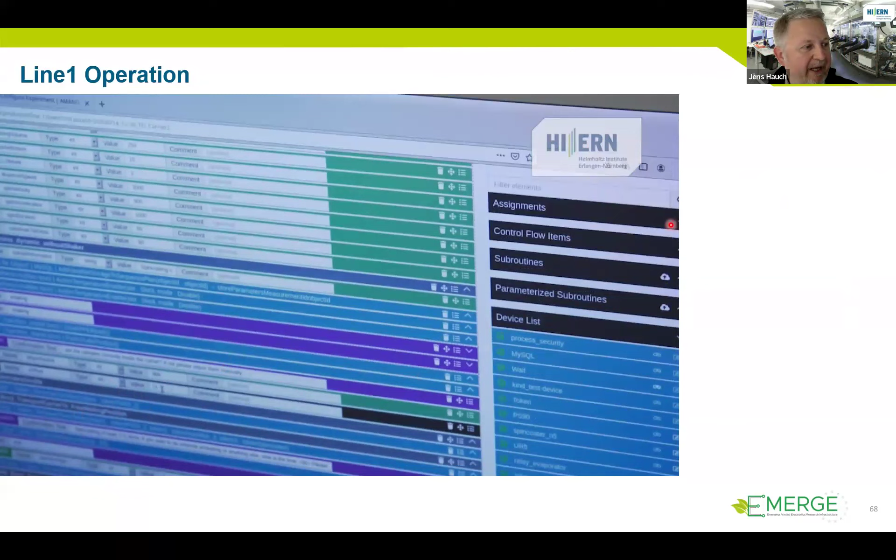How this works is shown in this video, again with the sound on that I do not know how to get rid of right now. So maybe just bear with me. What you see is similar functions, but as the SpinBot. Here, together with the characterization, all data that we create goes into the database that we have. Scientists do monitor what's going on, but all steps are automated and do not need any interaction with people anymore.

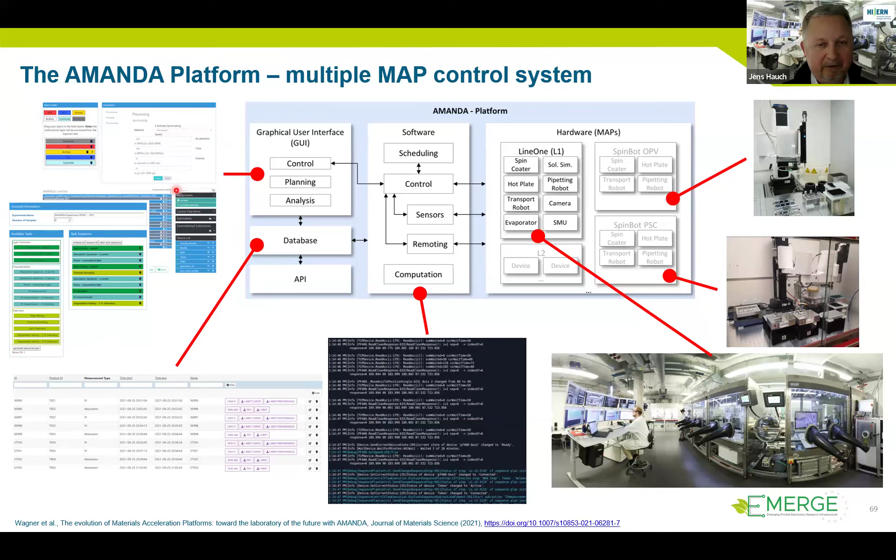What's behind it? This is the whole platform. So what you see, the visual or the physical manifestations, are these automated lines. Then we have a hardware layer where these are located. We have a software layer in between that does all the scheduling, that does readout of sensors, sending all the commands, as a computational layer where we can calculate things. We have a database where we place all the results, and we have a device builder that helps actually scientists create their experiments.

Then what do we get back? Here's an example of the data sets that we create. Every sample has its unique ID. Here's a list of things that were done and activities that were performed with the sample. We have an image of the layer. We have an absorption spectrum of the different layers. We have JV curves that we took of the devices. We have stability measurements, and all this is in a database.

And this database is actually connected to another system that allows us then to model all these curves.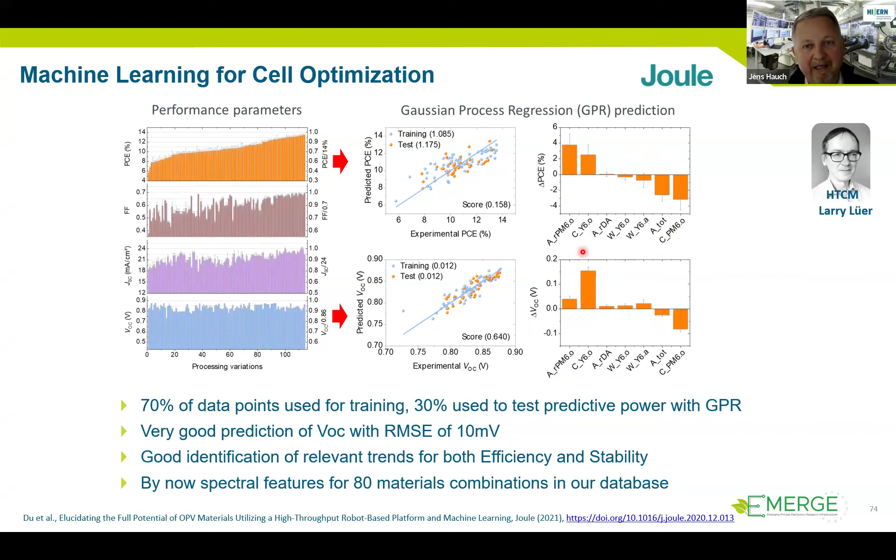And what we can show with this is that we can actually predict the efficiency. We can predict even better the VOC of a device from these spectra. We can actually then see over here which components that we are looking at are actually having the greatest impact on VOC, either increasing it in this case or decreasing it, similarly for PCE. So we can build structure-property relationships using these AI methods. So this is one big finding that we had from there.

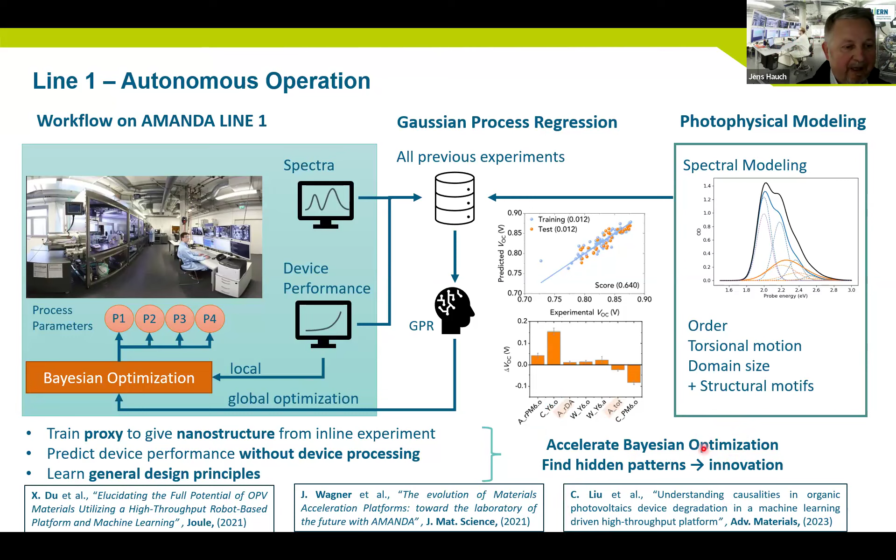We can also then extend this, we can improve it. So this was one contained experiment, but in the meantime, we have connected it with all the experiments. So we extend the learning, and then we can do transfer learning. We can use spectral modeling in order to improve our results. So all of this is possible when you have such systems. We have demonstrated multi-objective optimization. So here is some work by a PhD student of mine.

Tobias Osterrieder, who in this case optimized both efficiency and stability at the same time from a quaternary mixture. You could see that with relatively few runs of experiments, we can actually zoom in on a result. At this level, there is no further improvement, and we needed 9 cycles. This is what these systems actually do extremely well. They allow us to do multi-parameter optimization, allowing us to very quickly optimize in this high-dimensional space and find an optimal solution with a very limited amount of experiments.

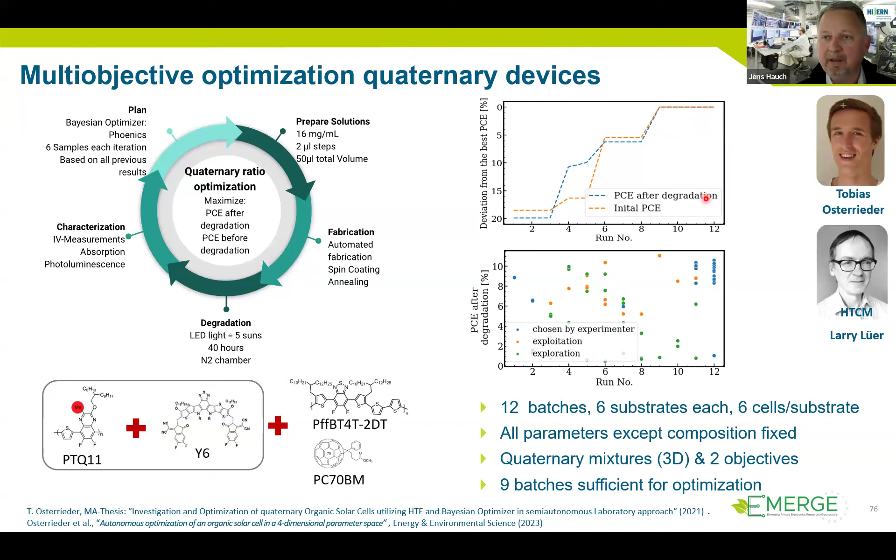So with this, let me come to an end, just a few minutes late. A few takeaways for you. I hope that I could convince you that new materials are actually a key factor to reduce CO2, extremely important. I hope that I convinced you that accelerating what we're doing and changing the ways we're doing is extremely important in order to solve the pressing societal problems that we have faster. We believe, and I hope you do too, that automation, data science, materials, machine learning are a path that can make this much, much faster and allow us to attribute our resources ways more efficiently - that we can get through very complex parameter spaces with machine learning quite quickly. In the end, we need to realize it doesn't just take one material, it takes a whole value chain to build an industry, but that's something for a different lecture. Altogether, we need to accelerate learning, and we need to get these technologies to market quicker. With this, I thank you for bearing with me, and I hope that I piqued your interest and will be happy to take on questions.